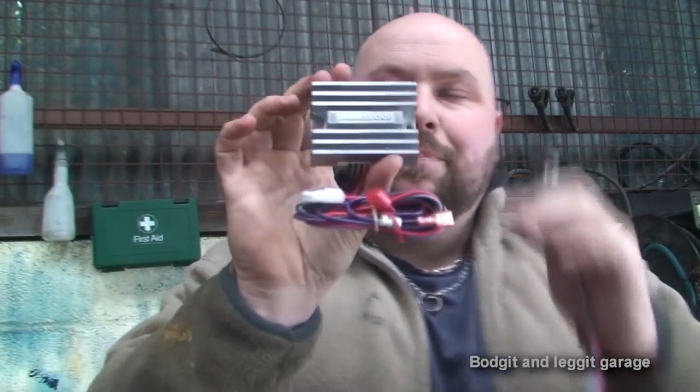So we have a brand new module here, and this is basically all clever and magic inside. What that does is convert—so we have this little gadget here too, which has a few leads. In between there you basically have an infrared beam. Every time the chopper goes through the beam, that sends a signal to this module, which converts that to a spark, allowing everything to work and spark each plug as the chopper goes through.

So these two are the most important parts. They're not cheap at all, but you don't have to do anything with them. They don't particularly break, they just are what they are. Best thing about these is you don't have to do anything—there's no maintenance at all. You don't have to come back every 100 or so miles to clean and check them. Maintenance free—you just put them in, fire away, absolutely perfect.

Which is a big thing, because with points, maybe once every couple of weeks you're adjusting, setting, and cleaning them, and it's a nightmare. Once this is in, we're going to have no problems. These are really the actual brains of the operation that we're putting in.

Now what should have happened is, with this fitting kit, we remove the old points, put this plate in its place, and this then screws to the plate—imagine it like that, set up for you, which is brilliant. But I can't do it with this one. I have to set this myself, but I'll go through all that. Not 100% sure I'm going to do it yet, but you'll see how once I do all the videos.

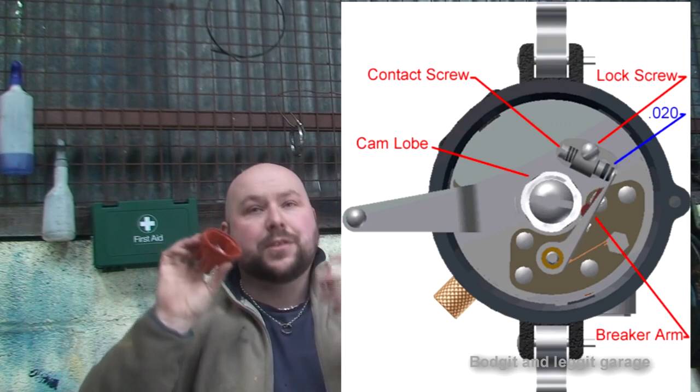Electronic ignition is just 10 million times better, because every time you come out to your car, whether it's cold, damp, or raining, you're going to start your car and it's going to start. It's not going to fail because of spark, whereas with points, it's a lottery - you can either start or it just doesn't. So that's the good thing about electronic ignition.

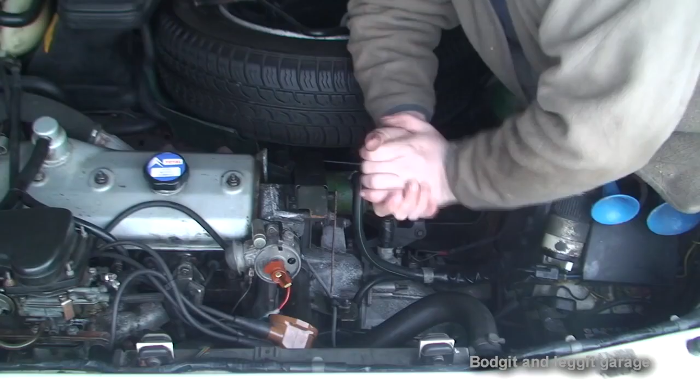I'm just going to show you on the car exactly what I mean. This is the distributor here. They more or less look the same on all distributors, some maybe slightly bigger, longer or shorter, but they more or less look the same. This is the distributor cap, which goes on over and clips. These are your spark plugs coming out. This is your rotary arm that spins around, and depending on which little pin it hits, that's which cylinder it's sparking.

But what we have on normal ones are the points here, so this just pulls off. On normal cars you'd have the points on the outside, but Citroen just likes to do everything different, so we have the points on the inside. The easiest way to know if you've got points or electronic ignition is to look for your condenser. If you've got a condenser, this gold thing here, you know you've got points. If you don't have a condenser, you know you've got electronic ignition. That's the easiest way to tell.

I'm just going to quickly whip this off and show you exactly what the points look like and how they work.

I do get how some people, if they've got an old car, want to keep it original. They don't want to stick new bits on, and I can understand that. But the other good thing about this particular kit is you will not know it's in. There's going to be a couple of wires coming out underneath here, but apart from that you won't really know it's in. The distributor is still going to look the same. You can even keep the condenser on top, so it'll look like you've got points. You can take it off, it doesn't really matter, but you can make it look like it's original.

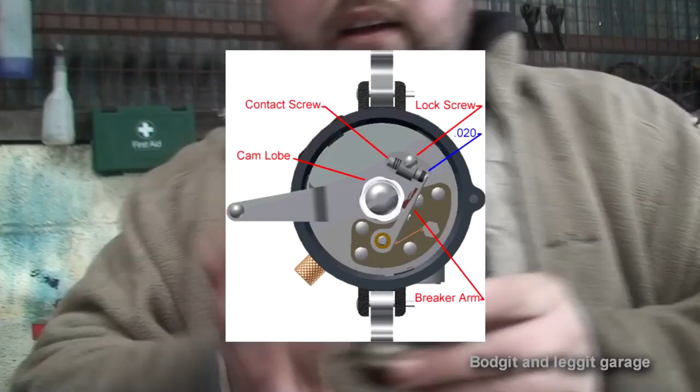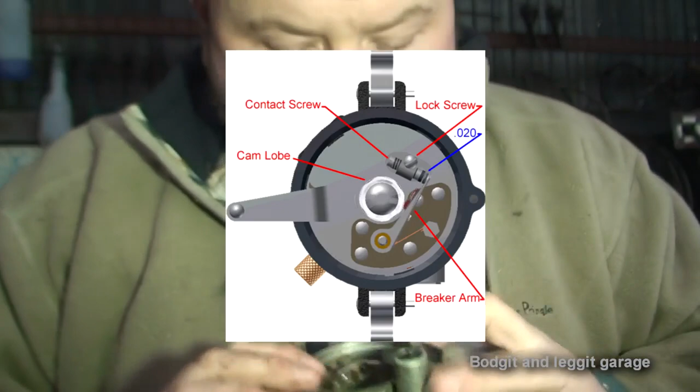Now, we have a set of points inside here. Just turn on the light so hopefully you can see a bit better. Essentially what happens is that bar you saw sticking out spins around, and as it spins around, this opens - not as much as this - but it opens and closes as it hits this little thing here, opens and closes, and that's what sends you the spark. That's basically how it works.

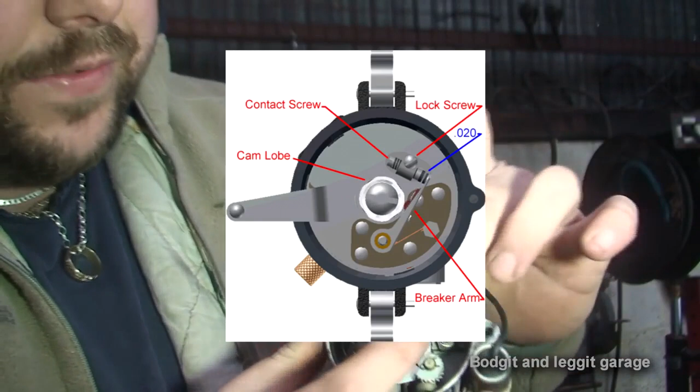But in these little strike pads, if them strike pads have gone, they've got dirty, or it's sparked at the wrong time and they've gone all black, they won't spark properly. And if they're not the right distance - if the screws come loose or anything like that and it actually moves - it won't open enough, or it'll open too much and the spark can't go between the gap.

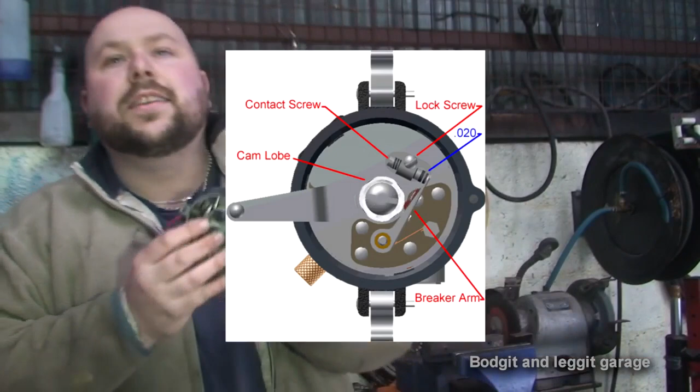They're not expensive to buy. New points, only a couple of quid. They've never been expensive, but it's the annoyance of it. You know, if you go to start your car and it doesn't start, and then, especially with points, if it doesn't start and you try and start, your plugs and your engine, they're going to flood.

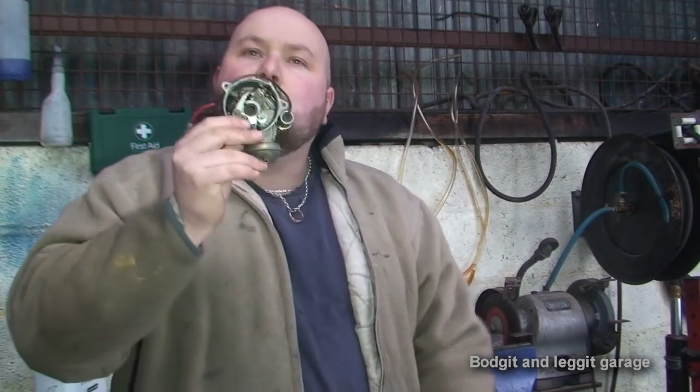So then you have to take the plugs out and you have to clean the plugs. You have to, and all this hassle because of these shocking things here. So once you take them out of the equation and put electronic ignition in, well then you're not going to have any problem whatsoever.

Obviously the newer modern cars with single coil packs and wasted spark and sequential spark, yes, that is better again. But with electronic ignition, you're never going to have a problem as regards the same problems you're going to have with points. Yes, of course you can still have problems - you can have problems with anything. Coil packs can go, anything can go, but it's going to be a million times more reliable than these points are here.

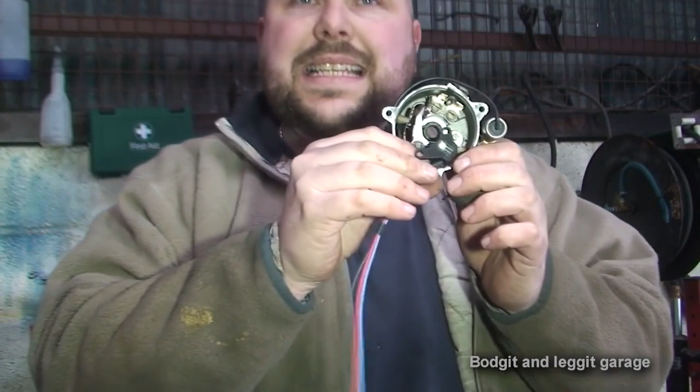So that's essentially what we're going to do. I'm going to take out all these bits and hide all these bits inside here, so you're not going to really be able to see it. My tricky point is going to be getting everything lined up so this is in the right place to hit when cylinder number 1 comes around.

That's what's going to take me a while. I'm going to have to make new brackets and stuff, but we'll do it, we'll get there. It's just unfortunately, rather than taking a couple of hours, it could maybe take a couple of days, but we're going to get there and the car is going to be a million times better for it. The customer comes out every day, it's going to start, he's going to have a smile on his face because he's driving his car every day and everybody's going to be happy.

So that's the bits we're going to put in. I'm going to go into a lot more detail once I'm doing it on the car, but at least you get the idea of what I'm going to put in, kind of what it looks like and what it does. I can only suggest if you have an old car, to convert it to electronic ignition, because you will just be a lot happier in the long run.

Now, we are replacing everything. If you're going to do this, replace everything - new leads, new plugs, new caps, new arms, new wires - because if you try and use the old wires, you're just going to cause yourself problems.

So if you replace absolutely everything and you're still having problems, well then you've got something else, unfortunately. But if you replace everything, you're not trying to go back on yourself. If you just replace half of it and leave all the old wires there, you're thinking, well, is it the wires or isn't it the wires, and all that sort of stuff. So I can only suggest when you do something like this, replace everything, buy the whole kit. Yes, it's not cheap, but you'll be thankful for it when the car starts and you get a big smile on your face when you're driving it all the time.

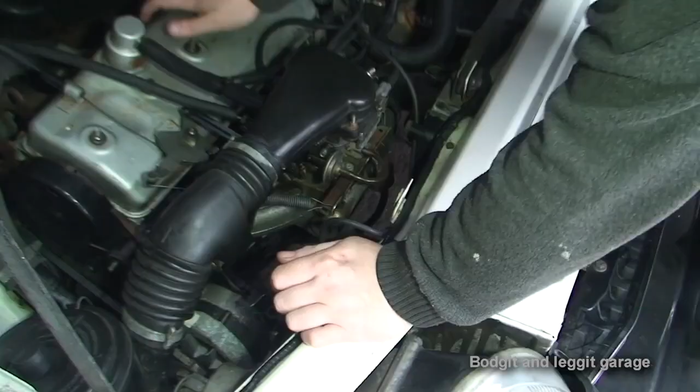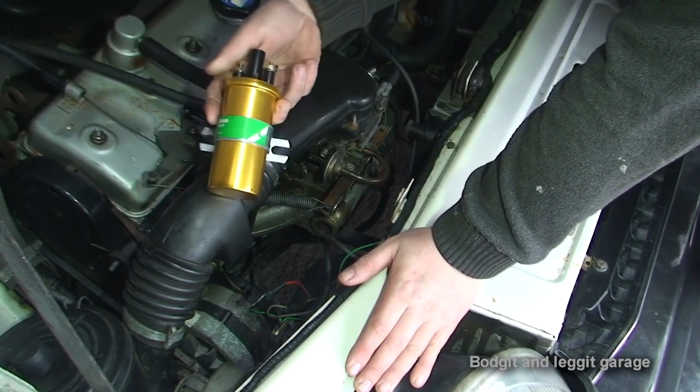Some things might be difficult for me to film because as you can see there's not a lot of room, but we have the old coil down here and the pre-resistor on the side of it. Once I get it off, I'll show you a lot better. It more or less looks identical to the new coil, even the way it fits in - there's just 2 bolts to let the coil fit in, or you can even just loosen the mount, it just depends. We're going to put the new mount on and everything.

You've got the HT lead that goes in, you've got plus and minus, so you've got the power that controls the rev counter and all that, plus also the power going into it to make the thing work. But we've got some really old connections here, so what I'm going to do is put the kit in first and then worry about the connections, because there's some part of the wiring loom I'm replacing and some part I'm not - I might have to put new connections on. As you can see with this wire here, we've got 2 connections within about 3 inches of each other.

Now the more connections you've got, the more possibilities you have for things going wrong. So I'm going to be taking out these connections because there's just no point having them - just having one connection, checking the wires. If the wires are okay, replace them with new connections, and we'll kind of go from there.

So what I need to do first is take this off, and it looks like 2 13 or 14 mil bolts. Well, the 13 mil bolts - one of them is easy to get, these are going to be quite tricky.

We only actually have to take one completely off and loosen the other one, because of the way the slots are - you should be able to get away with doing that. What I mean is, as you can see, these are slotted, so if I loosen one and take off the other, I can just slot this out. Now, just as I thought, we could slide it out.

But there's something else on here, let's just see what it is. We have the old coil - be careful because all these are coming off, you want to keep them. Now, obviously it's old. I don't know if you can see this, this is the pre-resistor here. There's a lot of rust, all the connections are rusty. This is the other connection I was telling you about, so you've got two connections within the space of a couple of inches of each other. So we're going to replace all of them. So there, that's it - all there, even the actual connections on the coil.

Again, I don't know if the camera's going to show this - try and spin it. They're all rusty too, so all that rust and the connections are loose, which doesn't help.

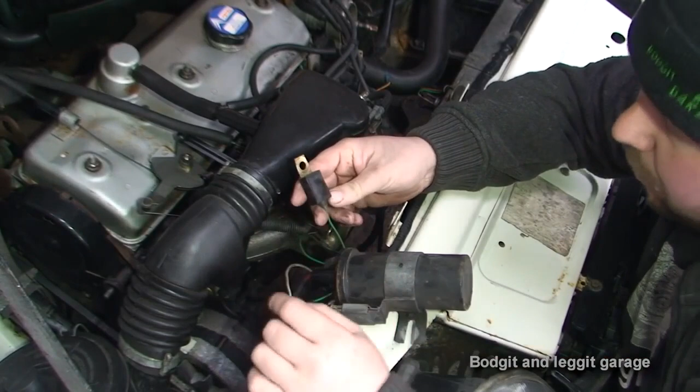So all that rust, loose connections, old parts—it all adds up to kind of a big deal when it comes to making this thing work. The last thing we have is basically a suppressor, a 2.2 microfarad one. What this is really designed for is radio interference. With this old setup, you might struggle to get radio stations or get interference. But with our new setup, we don't actually need this. It's a thing, don't throw it away, kind of keep it, and if you have any problems you can always put it back in. But with this new setup we should have no interference problems, so I'm going to get rid of it for now.

So all this is going. Like I said, I'm going to keep the original connections just for the minute. I'm going to wire everything in, and once I've got everything in place, I'm going to go through everything to see what I need to take off, what I can live with, and all that type of stuff. So we're going to install everything first before I worry about cutting any of the wires off.

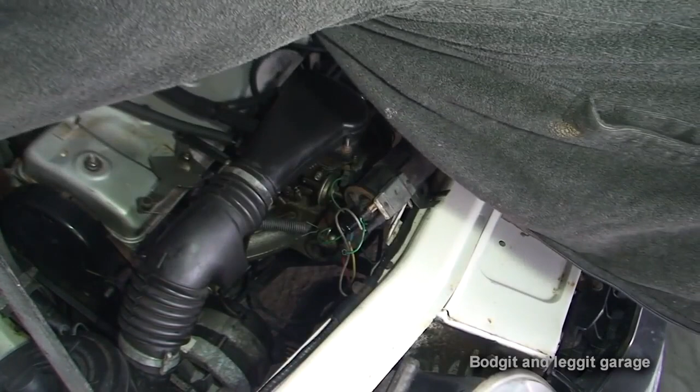What I'm going to do now is very simply just put this back. I'm also going to make sure I've got this the right way—as you can see from the coil, you've got a plus and a minus. This can twist within this, and we have the plus towards the engine, so when I put that in, my plus is towards the engine, not the other way. I can't show you because it's too dark down there, but I've just put it on the two little clips, two 13mm bolts, and that screws it securely to the frame or the mount of the car.

Now if you are unsure when you're doing wirings, it's always good to take pictures of everything. Just get your phone out and take pictures, because if you accidentally pull a wire or something falls off, you know exactly where it goes. It's no harm to have a reference.

What I'm going to do is—no point filming this because you can't see. I'm just going to put this second bolt on, secure this, then we're going to transfer the wires from this coil to that coil, and then we're going to continue on with the job.

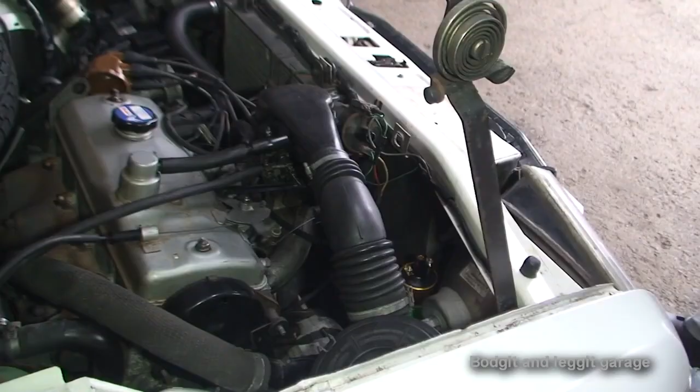Right, I tried to get a bit better camera angle. You can see the new coil just popping out here, and this is the old coil. Like I said, we're not using this, so I can disconnect that, and luckily the connection I was telling you about was actually for this. So we can take that out. Again, I'm not going to throw it, but we're going to take it out and just use the straight connection. So we've got two of the battery connections, or power connections, here.

Hopefully the camera's picking up, but you can just see how rusty that connection is. Now, we are going to be replacing all these connections, but for the time being, I'm just going to put everything in place before I worry about replacing anything. So I'm just going to connect these two wires.

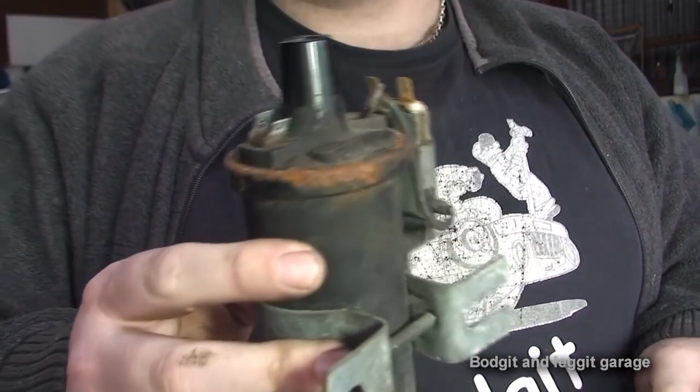Now we'll have the coil and everything out. So that's the old one. Now I can show you this a lot easier. You can see all the rust, all the connections, they're just rusty. This might not be the genuine one, but it's definitely going to be 20 odd years old, if not maybe 30 odd years old. So it's good replacing that. The one we replaced it with is a lot stronger and a lot more modern.

Again, we're not using this unless we have radio interference. We will use it, but at the minute we shouldn't need to. Now, a bit of history.

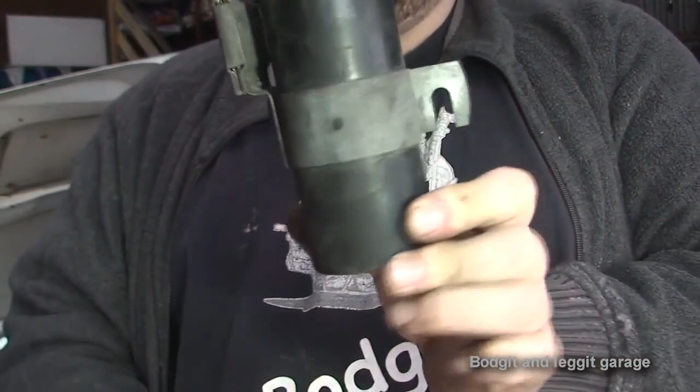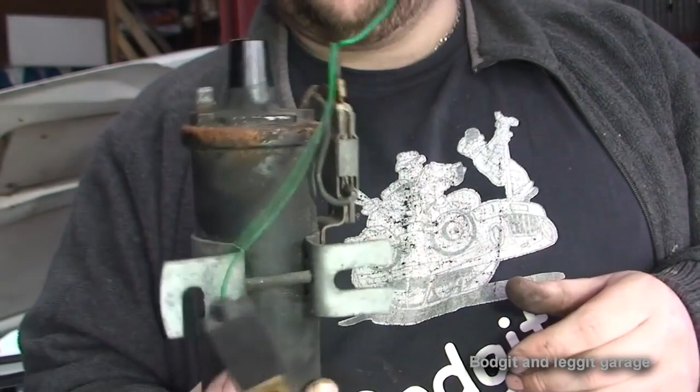And the other thing about these pre-resistors is if they're not working properly, they can take all the power away from the actual coil. So with the new modern ones, you don't need these pre-resistors. So we're going to put that away, not throw it, just put it away.

Next thing I'm going to do is take off and make the new HT leads. As you can see, I've marked the cap. It's 1, 3, 4, 2, which is the firing order, but we've marked the cap so when I take them all off, I know basically where to put them back. I am going to be getting a new cap, but I'm just going to use this one for the time being. Now I'm just going to pull the plugs out of the way.

Now the plugs are off. One thing I have noticed, I don't know if the camera's going to show it up, there's a thing here. It looks like a little suppressor on the HT lead, on number 1 HT lead, and it goes down to another little box. I think it's kind of a rudimentary diagnostic socket. This will monitor the spark and the revs, and it monitors other things as well. It's the same as the timing light you put on - this is basically what that is, so it allows you to monitor it.

I don't think it's particularly needed. I'm going to put it back on, but I don't think we really need it. It's not going to affect us. I can still put my timing light on, so it's not the end of the world.

But I just want to take all these leads off to get the length of them for the new ones. So what I'm going to have to do is pull this off so I can take that out now. And we can still get the length of the lead. So we should hopefully now have, as we can see, all the leads off.

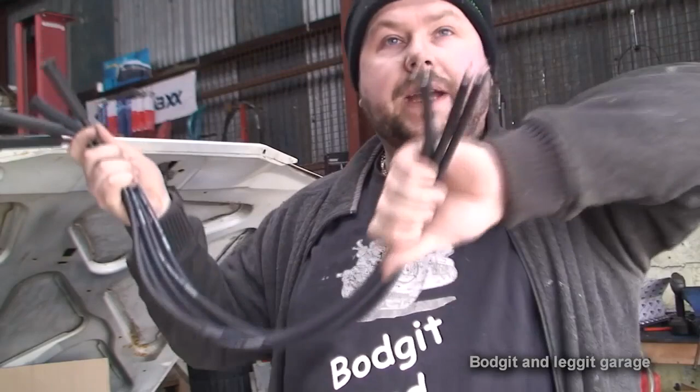And this is how we get them. We get the spark plug socket on one end, and we get nothing on the other end, because obviously we can cut these to size. Now you don't really have to cut them, but it just looks neater if you do. And we're going to use the old ones as the template for these new ones.

And we get the one in the middle then, that goes between the coil and the HT lead. That's got no ends on, so we need to make both ends, but lucky enough I think that's just the right length. I don't think we're going to have to cut that one, but we're definitely going to have to cut some of these here. So let's get this set up on the bench and we'll show you how it's done.

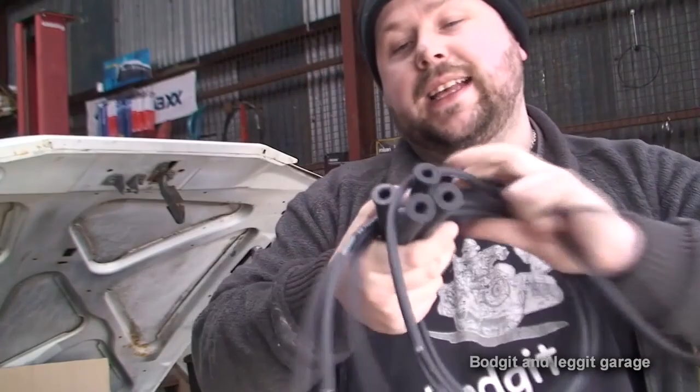Now, the way I like to do it is lay everything out first so you know where you're kind of going. So I've laid out the kit that I got. This is just some conduit, and what I'm going to do is put the HT leads inside this conduit so it just looks like there's one kind of lead rather than 3 or 4. I'm not going to be able to put number 1 in this because of the thing I showed you on it, but I can put 3 of them in it. It just makes it look a little bit tidier.

We have the old leads here, so I know the measurements, and we have 2 sets of connections. Now, unfortunately, they're both wrong. We're not going to use these ones, so we can move these out of the way. We need this one - this one is for the coil. And again, these ones are kind of right, but unfortunately, as you can see, they're a 90-degree angle, and we need straights.

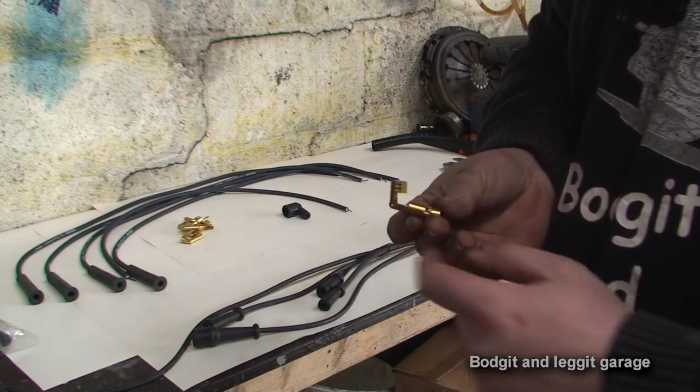So these are going to be no good, but these will be. Now, I'm going to have to cut these here, not use this 90, but that's not the end of the world. So I'm going to take one of them off here, I'll take number 4 off. Wait for a minute, just so you can see - these have been made up as well.

They're not genuine ones, and as you can see, if I pull this one out, we have the little connection there, so I can still use half of this connection. I'm just going to cut the 90 off and still use this connection, and I'm also going to use these rubbers here, so we'll be able to get away with it.

So it's just a case of pulling these off first, as we can see. Pull it off. Now I've pulled the whole thing together, but that doesn't matter. I just need to get that out there now. But as we can see, that is now out of there. But we still have this for our lead. So what I'm going to do is, I don't need the old connection, but I do need the rubber.

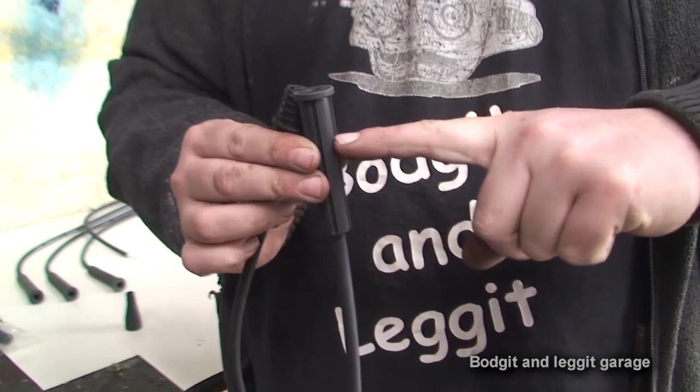Pick one of these leads. Now what you do have to be careful of is, inside the lead, the electrode starts there, so where it actually connects to the plug is there. So remember that. If your old lead starts at the top, you're going to have to stagger your lead, because you have to be very careful. These, to be fair, they look like they're about the same distance down.

It's a simple case. Now also remember, well, I didn't take that much off, so that's okay, but we need to cut, not here where the actual rubber ends, but where the actual bit inside ends. So we need to cut here. So just, that's another thing, don't cut where the rubber ends, because you need this bit of tail sticking out.

So just put them all together, put them down. And cut, simple as that. Like I said, these are new modern plugs, so internally they're a lot better and more modern than the ones we're taking off. And now what we need to do is cut and get a little tail, as you can see, so the wire in the middle, we need that now. And again, you can use the bit you've cut off as a guide, so you know roughly where to cut it.

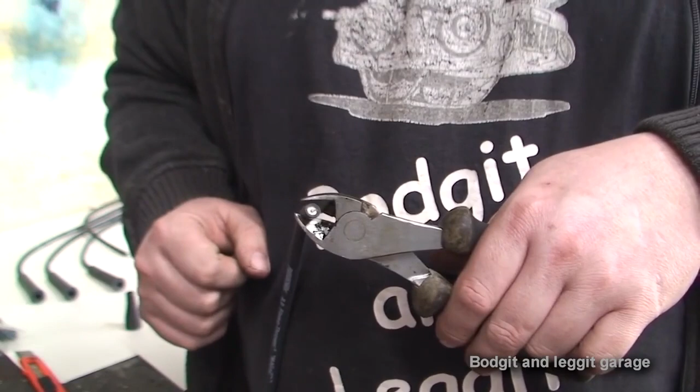Now you have to be careful here, this is like stripping wires. You have to take the rubber off and the white core out, but leave the actual bit in the middle free. And if you're unsure and a bit scared, the easiest thing to do is practice on the bit you've just cut off. Now all I'm doing is basically cutting it, and you can actually see that popped out. But again, I'm used to it. I'm used to doing that with wires and all sorts. So practice on the new bit first.

All I was doing, as I was pressing it, I was twisting it around my hand. So I'm cutting it, but I'm not pressing. If I press all the way through, too hard, I'm going to cut it off. So I wasn't pressing all the way through, I was just cutting it. And once you've done it, you can actually see. But again, if you're unsure, just practice.

So again, I'm going to do it on the proper one. So just cut it round and pull it off. You can feel it going in. Simple as that. But you have to be careful, because it doesn't take much to snip that off. I'm going to use this, rather than using this to crimp it, because on the 90-degree bend, I'm going to crimp it internally here. Still exactly the same thing, it's not going to make any difference.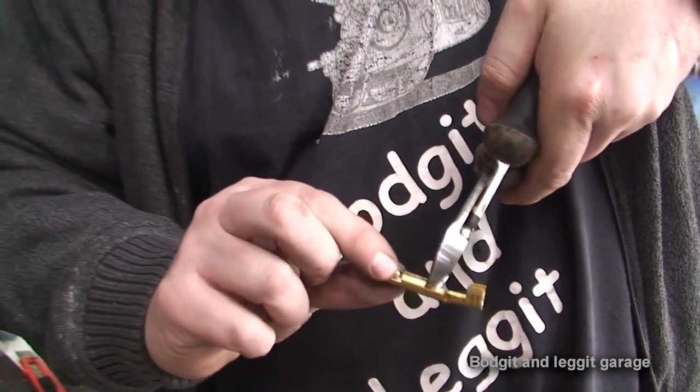I just need to make this smaller. So you can actually just push that straight for the minute, so I can get to it. And all I'm going to do is, how close do I want it? Yeah, that'd be fine. Cut this directly at the split. I don't know if you can see that, there's like a split in there, so I'm just going to cut that directly from the back. This might be a lot harder than... there we go. Just get through there.

Now I'm left with just that. Now once we've done that, what we need to do is bend the little tail down like that. Simple as that. Put this on then, not that one. Put this on now. The little tail you've bent down, make sure, as you can see from the connection, this is the split end, make sure it goes in where the end isn't split. So make sure it goes on the back where it's flush. So all you got to do, you can see, I'm just going to push that down.

Again, it can be a tight fit, so I'm going to have to open this out slightly. So I'm just going to open the connection out slightly. So I've just, hopefully you can see that, open that out.

Lucky enough that didn't go down, because what I've got to do is put on the rubber connection first. Now, these are thicker than the old leads, so it's going to take a bit of fiddling just to get this down.

To make it easy, I'm just going to spray a bit of lube down here, so this should hopefully slide on that bit easier now. Once I get it past it first, initially it's going to be okay. It's just trying to get it past.

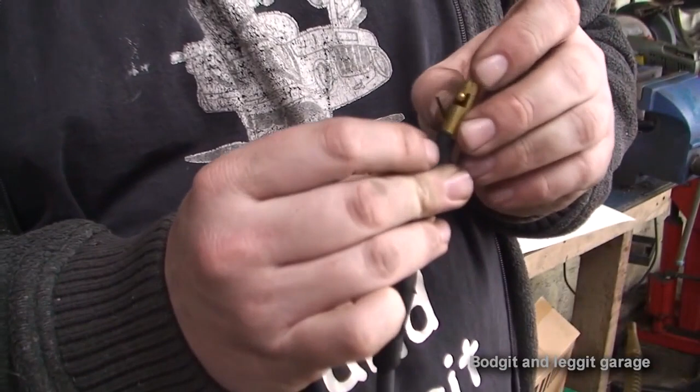Now, so the little leg we was talking about, you push the leg down and make sure it's at the back, not at the point here, because obviously as you can see it's not going to get a proper connection if it's there. So we need to make sure that's at the back. It just stops it from moving and puts it in the most secure position possible. All we do then is slide this all the way down until it meets the top of the connection.

Then we need to crimp it. Now there's most probably a special tool for this, but I don't have one, so I'm just going to use the pliers. I've never had a problem using pliers before. First I'm going to squeeze it together, but then I'm actually going to crimp it down.

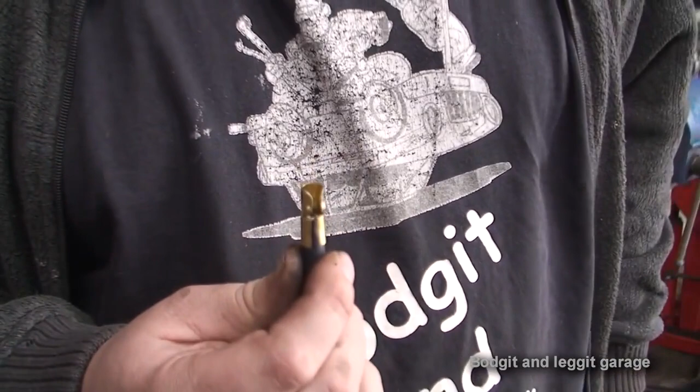I need that, as you can see, I don't know if the camera's showing you that, but that's actually gripped into the rubber. If I show it this way, and we can do the same with this one, it's actually gripping down and pinching the rubber. Rather than just squeezing it together, I'm trying to squeeze the two ends down so they actually pinch into the rubber.

As you can see, that's basically it. So again, it's best to squeeze it together and crimp it down at the same time. Let's see if I can do it on camera. It's a bit difficult on camera, but you get the idea.

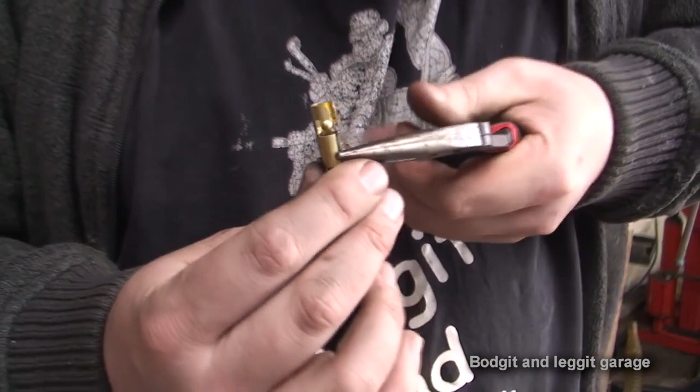So we can move further down into the pliers, crimp it down, crimp it together. As we crimp it down and crimp it together, believe me now, that is not going to move. And it's always a good thing to check it - try and pull it apart, because you shouldn't be able to. If it pulls off too easy, you know you're going to have to do it again.

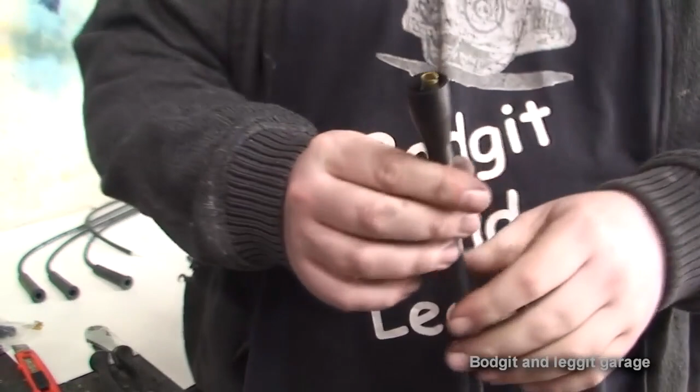You kind of do have a couple of goes with this, but you do want to just get it right the first time. And then we slide this back up. You want to keep it - well, it depends on what cap you've got.

But you want to keep it just above the cap. Maybe sometimes you might want it about there. The easiest way to know if you've got it right is you want to fit it back in the cap.

Make sure it actually crimps in and pushes in like that. You don't want it pushing in and it only goes up to there - it needs to go all the way in like that. So that's how you know, and it's as simple as that really, nothing to it. And then the other end is for the plug.

Now, yeah, I can't show you the connection inside there, but it's very similar to the connection I've just shown you.

You can feel, now this is not the right plug for the car, but you can feel it kind of clipping into the connection.

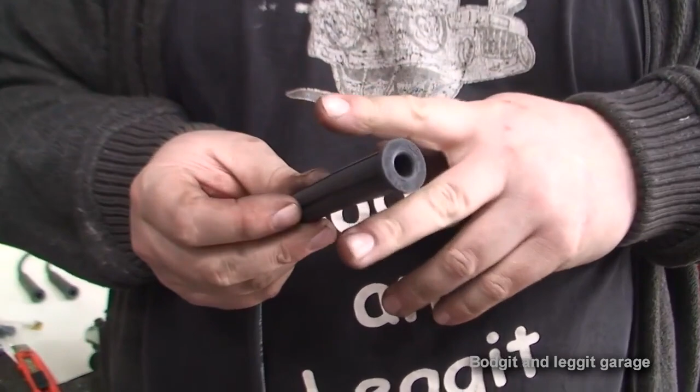These connections can work their way loose too. So if they don't feel like a good connection, you can very carefully get some pliers and push down onto them, just to crimp the connection together - you're not able to see in there, but that's as simple as it is.

It's very, very simple. What I'm going to do, just so I know for my own sake, is do one lead at a time and mark on the lead what number it is. So this lead is number 4, I'm just going to do 4 lines like I did on the distributor cap, just in case for any reason it gets muddled up and I don't put it back, we know exactly where it goes.

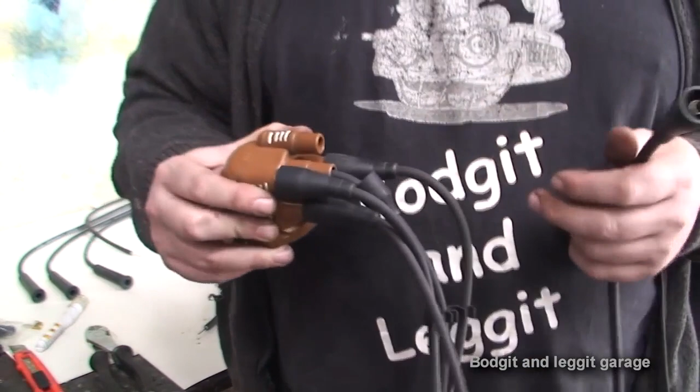Once you've actually got the job done, you can just wipe the Tipp-Ex off so you can't really see it, but we just know then that this goes to number 4, we know it's in and we know it's fine. I'm going to do the rest, the other 4 now, because I've got to do the centre one, and once I've done that we'll turn the camera back on and it's one more thing done.

One thing you need to make sure of is when you're crimping these connections, if you crimp it just one way - I'm going to show you this old one - if I press all the way down, you can see that's now oblong, that's not completely round. And the problem if you do that...

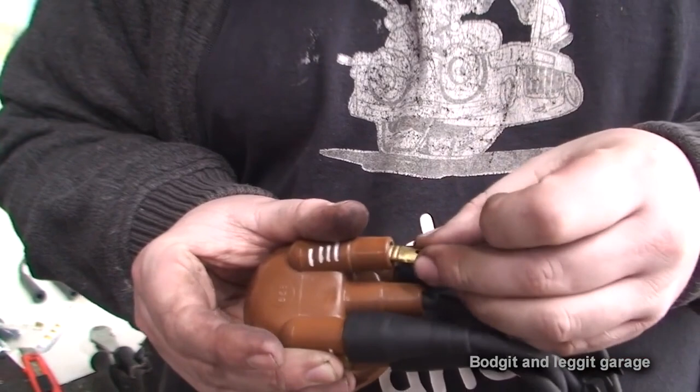It won't fit in the hole. Now I know it goes this way, but as you can see, it's not round and it actually gets stuck. So I'll just show you this way - it won't go in. So you have to make sure these connections are round, well, not perfectly round, but a lot rounder than that.

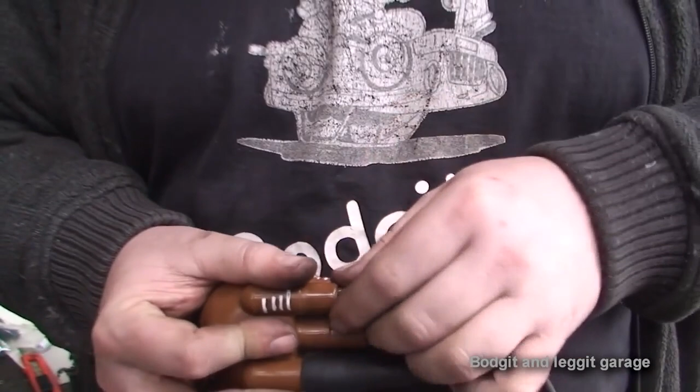As you can see from the connection I've just done, you can push this in and this will go all the way in. I don't want to do it because I want to put this on here first, but as you can see, that will go in, it's not going to get caught. It doesn't just go that far, it goes all the way in, it's not going to get caught.

So it's a good thing to make sure your connections are round, because when your cover's on, you won't be able to tell properly if it goes all the way in, and it might not be making proper connection, and you'll be thinking, why is the car not starting? And the last place you're going to look is here. So just double make sure that connection goes in all the way.

Now this is the thing when you're doing a job like this, everything keeps changing - I've changed my mind a few times. On the main lead that goes to the coil, I've put a 90 on it, so when the actual cap is in, as you can see, this comes off at a 90.

It used to be straight, and as you can see, you're kind of putting pressure on that wire there. So what I've done is made it a 90, so this can go off to the coil and it's a straight connection, it's not putting pressure on the actual connection here. It's nice and straight - that's something I kind of thought of as I was doing it.

I cut this connection in half and showed you how to fit it, but I've stopped that. I didn't like the connection, even though it would have worked, but I just didn't like it. We have enough room to actually get one of these connections straightened out, so as you can see, I've just straightened it out.

To put the straight connection on - but luckily this rubber cap is long enough to actually take that. So that's what I'm doing now, I'm just going to put it exactly the same way in, squeeze the two ends down.

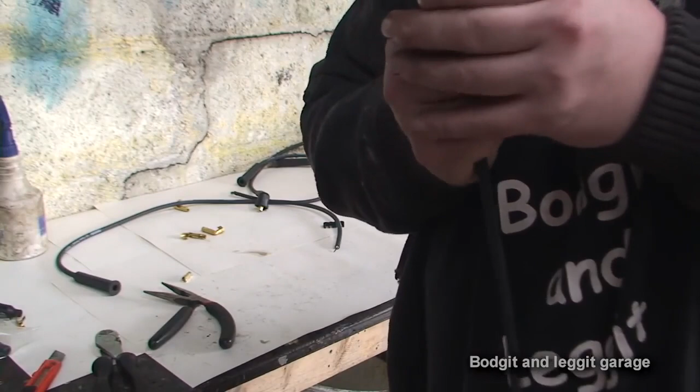Squeeze the two ends down and give these a nice squeeze down and together. It doesn't matter if they're sticking out slightly like that, or if they're not perfectly round. All that has to be perfectly round is this connection down here. But this will still slide on to about there, because that's where it needs to be. And it fits in nice and easy, just like that.

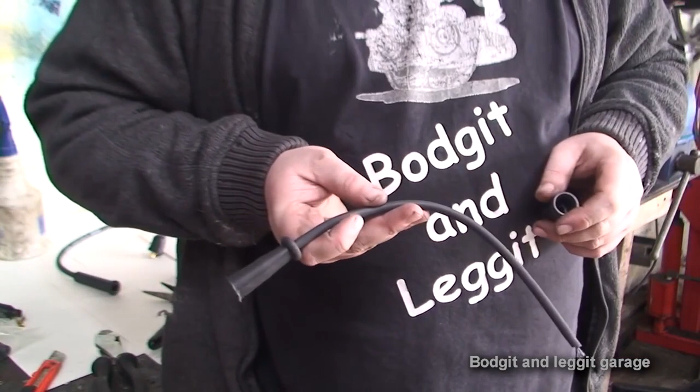Now the only thing I've got to be careful of - number one, it's falling off, but it doesn't matter. Number one, I can't make up on the bench. This is number one lead. I have to make it up on the car because I have to slide that little electrode thing, or electromagnet, whatever it is, through, so it can actually monitor the spark. So I'm going to do that on the car. That's the last one I've got to do, but it's going to be done exactly the same way.

As you can see, they're a lot thicker, a lot nicer, and especially with this connection being a 90, it's not going to put so much pressure, because this is the most important lead. This is the lead that brings all the spark, and then it separates it to these ones depending on where the rotary arm is. So it's going to look a lot better.

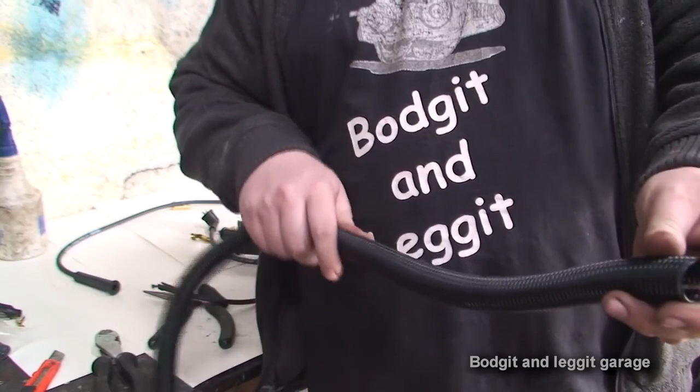And once I put it in this conduit, again, it's going to just look really neat. We can then put the conduit and maybe cable tie it to some part of the engine that's not hot, obviously, and it'll just look a lot nicer when you look under the bonnet.

So let's get cracking. Now, what I figured this is actually for - this must control the rev counter. So that's what that does. It basically reads the spark and gives you how many revs the engine is doing. So you have to remember to build this on the engine - I have to put this connection on the engine because, as you can see, it doesn't come out. So that's just a quick thing.

What I've done here is, as you can see, I've got the actual cap, and I've put it all in a conduit, so it's nice and neat, and the leads are sticking out. I can't put number one in it, but I might be able to slide number one in just a little bit - it's going to make it a lot neater. And with the 90-degree bend that's on here, that will actually stop - as you can see, that goes to the coil then - that won't put any pressure on the actual coil wire, so there'll be no pressure on the joint there.

But that's just how it evolves as you're doing things. You just think of things, think 'oh, that's a good idea,' and it just kind of evolves that way. So what I'm going to do is most probably put this one under here, cable tie it nice and neatly, so you don't really see that.

What I'm going to have to do next, I'm going to take the spark plugs out, get ready for the new ones to go in. The 16mm spark plug. Oh, that's very tight. Jesus, that is tight. Need a longer ratchet, but that is... Oh, that was tight.

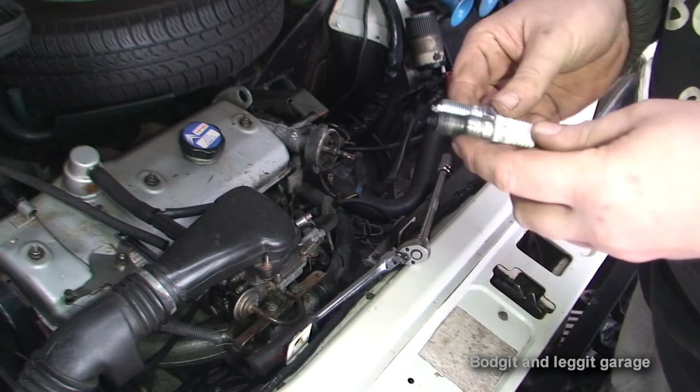Now these plugs are going to be very black because the car wasn't running properly. So we're going to put new ones in. With all the new stuff we put in, it should be a million times better. The new ones we got are the same name, so we can actually check the numbers, and the numbers are right, which is good - so we definitely know we've got the right plugs, but it's also just a good thing to check the length, everything about them.

And as you can see, that's the black one. Now, when a plug burns properly, the colour you need to look for - it's an old plug, but as you can see, it's kind of a biscuity colour. That's the colour you need to look for. To be fair, on this car, you might not get that exact colour because it's the older kind of style of ignition - this is designed for a coil pack, and that's obviously a lot stronger spark. Now, we are going to get a stronger spark with the system we're putting on, but that kind of gives you a good idea what to actually look for. Again, it's very black, and there's a lot of petrol on there because it wasn't running properly, again.

So we are going to get black crappy plugs. Now one thing I'm going to have to be careful of is I don't know if we've got any problems with the carburetors or gaskets leaking or anything like that, which means it's going to be drawing more air in and tricky to start. So what I'm going to do is put all the system in and see if it starts. If we're still having problems, then we know we'll have to look into this, but hopefully that's not the case.

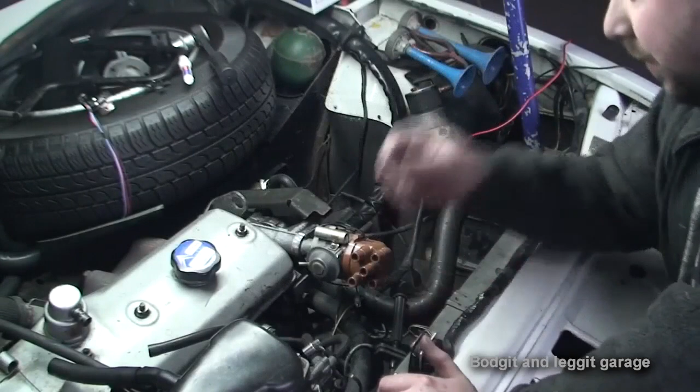Now I've been at this for a couple of hours, and hopefully I think I've kind of got it right. So I'm going to go through with you what I've done, what I think, and we'll just kind of go from there. Now I'm just going to move this back for a minute.

This was the position of the original distributor, it was in that position there. As you can see, I've got Tipex marks everywhere because this is important. So this was the original markings of the distributor, and as you can see, I've got Tipex marks here and one on this side which you can't see. This is for spark plug number 1, and this is for spark plug number 3. They're just marks for me.

So if I whip off this, again, I've got Tipex marks everywhere. Now this Tipp-Ex mark here lines up with the middle of here, which means this is cylinder number 1. This is when cylinder number 1 sparks. When you turn the engine and it goes to this mark, it means cylinder number 3 is going to spark.

Now the plan is to hide our new part in behind here, so I'll just move that out of the way. Now as we can see, I've got more Tipex marks down here. You might not be able to see, but I've marked these little weights inside because I'm going to have to take the distributor off, and I want to make sure I get it back in the same place, because otherwise it's going to cause an absolute nightmare.

Now what we have to do with this little chopper, now I'm hoping this chopper is right, it looks right to be fair. Once I put it in the middle here, it lines up with all the little contacts inside. So each chopper lines up with the contacts inside, so I'm pretty certain it's right. So what I have to do is fit it into here. Now I'm not 100% sure yet how I'm going to actually seal it to this. I might just put a few washers to kind of keep it pressed in.

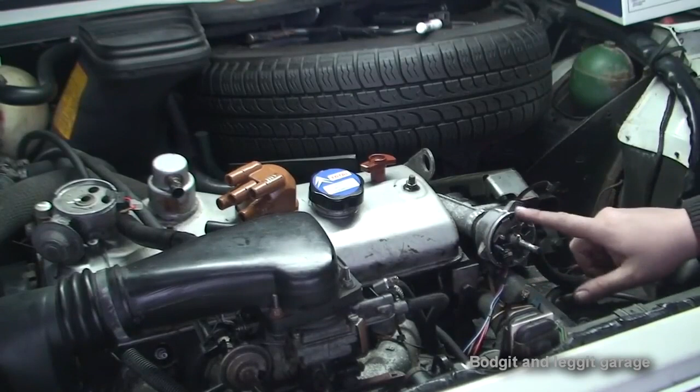That's not going to work there. Now this is where it kind of gets tricky. Maybe it's not going to affect anything if I put it down here, or even like that, and potentially use this as number 1. The only reason I say that is because this little gadget is not going to know that this is number 1 here. I'm setting this up to be number 1, so it's not going to know any difference.

Even though the actual rotary arm is going to be pointed up that way, which is not going to make any difference to me, it's still going to spark at number 1 here. So I might have to do something like that. But even that there now, let me see that one. See, we're getting very close to all these little nubs.

So maybe, let's see, definitely can't do it there. We're not going to be able to do it there. So this is now just turned into more of a nightmare. Now I think we'll get away with it there. I think we will get away with it there.

But again, I'm going to have to rip the distributor out just to see before I do this. And because I've got everything marked, it doesn't make a difference. I can just put it back in if it's not going to work out. So, yeah, I'm just going to see now if that will work. I can't see why it won't work, because it doesn't know.

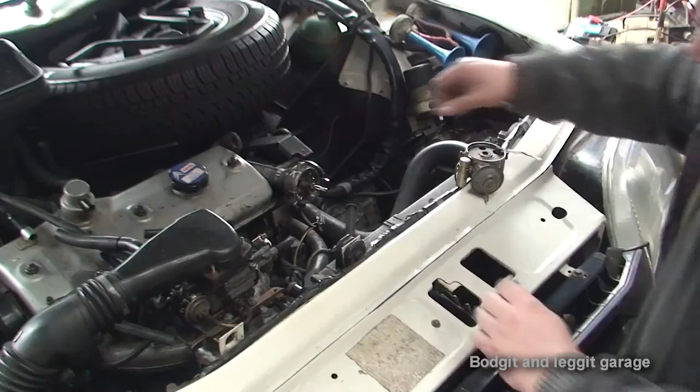I'm setting this up as number 1, so it doesn't know which one is number 1, 2 or 3. I'm going to have to do a bit more thinking on this, and then I'll turn the camera back on and I'll see where we're at, and hopefully we can figure something out.

Right, hopefully this is all coming across. We have the distributor here and I've got it all marked. It's very important, before you take it off, you need to mark the actual body of the distributor, where the main body fits onto the car, which is very important. But not only that, you have to also mark the inside of it so you know where it goes back.

Because, for example, if I take this out, I can spin this, as you can see. Oh, maybe not. I can spin this in any direction and just fit it back. The body of it will line up, but the inside is nowhere near the right angle for it to spark. So it's very important that you actually mark everything properly before you take it out.

Now what I've done is, and it sounds very simple, all I needed to do was drill 2 holes in the main body of this distributor to line up this bracket to hold the electrode, to make it spark. That sounds very simple, and it's taken me hours upon hours to figure out, but hopefully I've done it.

As we can see, I've got a hole here and a hole there. I've had to modify this bracket, shaving off the legs to make it a bit thinner, because I was having clearance issues with the weights inside here. As you can see, this spins around, and I needed this bracket low enough inside the distributor so it would fit and line up with the chopper, so it would all be in the right place.

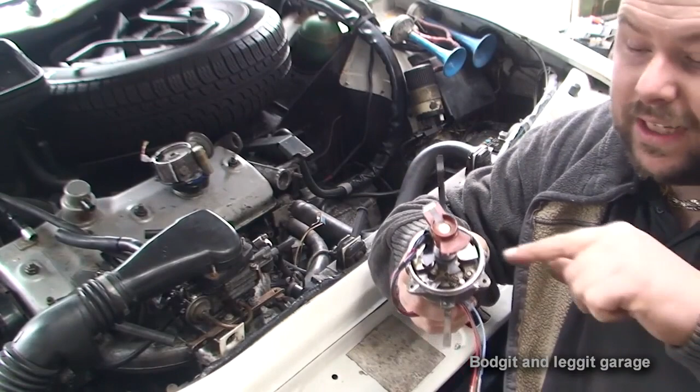So I'm going to drill and tap these 2 holes. M4 is the size of the bolts. So I'm going to drill and tap these, get this to fit. Now here we go, I think I've got it done. Doesn't look like much, it's technically only had to drill 2 holes, but getting this lined up has taken forever.

I'm going to have to glue this chopper down, I think that's going to be the best thing to do. But basically, as we can see, I've got marks on the distributor for the cylinders. So we've got the firing order 1, 3, 4, 2. Number 1 is lined up with the Tipp-Ex mark, that's chopper number 1 gone through. As I twist it around, chopper number 2, and as I twist it around to all of them, they all line up with the marks. So I should be fine.

I might have to adjust the distributor slightly, but we can do that once it's in. I'm not 100% sure because this is the first time I've done anything like this. Normally it's just an easy case of fitting them, but getting all the clearances right, making sure everything can turn without catching, and lining everything up, is taking ages.

There was no point filming it, it was just too boring. I had to put it down, turn it around, make sure it wasn't catching, then line up the distributor marks, and it's taken forever. But as we can see now, I've got it. If I take off the rotor arm, you can see as that turns, the rotors go through the sensor, cutting the sensor, which then, from these leads here, turns that sensor cut into a spark. That's how it works.

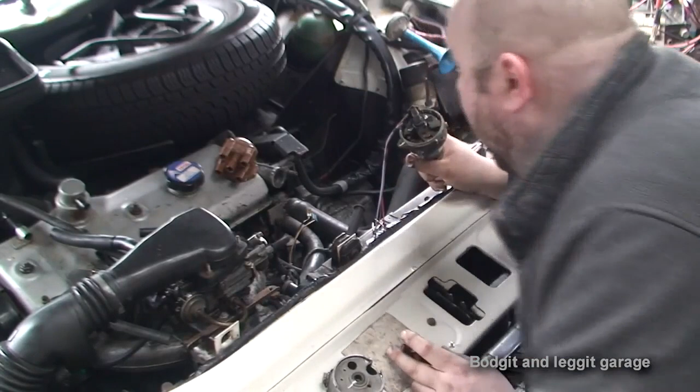You shouldn't have to glue it on, but I'm going to have to glue it on this particular case. I can't really see any other way around it. Worst case scenario, if it ever does break, we'll just get a new rotor. It's going to be annoying when it's glued on, but I can't see any other way around it. To be fair, as long as nothing moves, this rotor will never really get damaged, so it should really last forever as such. We shouldn't have a problem there either.

I'm just going to have to make something up for this, some sort of metal plate to stop most of the crap from going in. And that really is essentially it. I mean, there's not really much more to go now, I don't think. I shouldn't have said that now, because that's mostly going to come back to bite me.

But yeah, I think essentially we are very, very close. We do have to make sure that the holes we've opened up are going to have to be blocked off, because we don't want to get crap in here. Even though if we do, it shouldn't really matter, but we still want to keep that inside as clean as possible. So once I've got this on, there are going to be a few things we have to sort out just to get it kind of watertight.

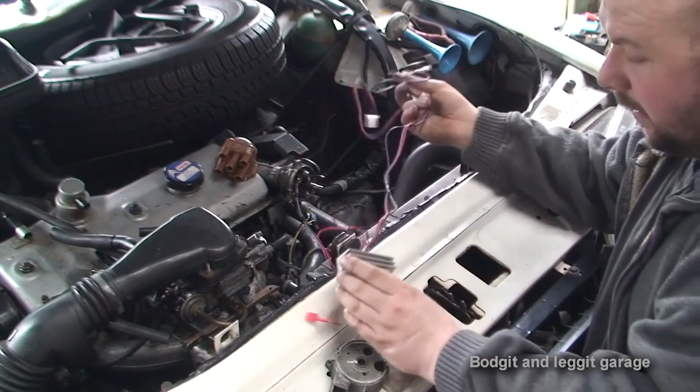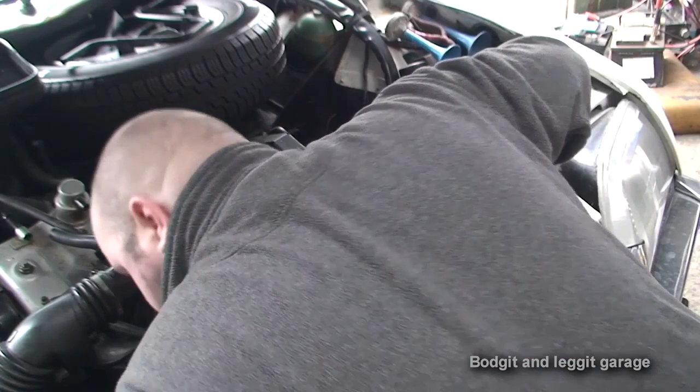It's just a case of wiring now. The 3 wires coming out of the distributor go into another block connector, which goes into this connector here. Then we just have a few more connections that go into earths and stuff like that. Very simple. I just need to figure out which is the best place to put this, because I want to kind of hide it, I don't want this to be seen here. Hopefully we should have enough to hide it somewhere down near the coil. I'm hoping I can mount it at the back of the coil or something, but that shouldn't be too hard, hopefully anyway.

And it's just a case of getting these wires nice and neat. I might have to bring the wires up to here and tape them inside this one. I'm not sure yet, we'll figure that out later. But that's really essentially it, it's just wiring now. So I'm going to leave the wiring to the final part of this video, and hopefully I've explained what I've done here. It is fairly simple, it just takes a long time to get lined up.

With the normal kit for this, you'll have this part done in seconds. It's not really a big deal, it's just the wiring then that can take a while, but hopefully now we should be very, very close to hearing this thing fire, and fire properly.

Fingers crossed. What we also need to do is open up the spark gap as well to 0.6. I didn't mention that on the other video, because we've got a bigger spark now. We can open up the spark plugs to 0.6, so we'll have bigger spark, and everything should run a million times better. But what I have done is I haven't done any damage here, so if someone ever wanted to put it back to the original points, you can actually do that. It's important not to just rip everything out, because you can always put it back at a later stage if you want to.

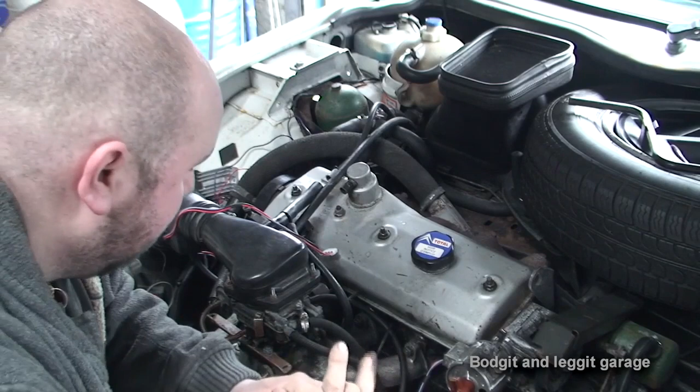We're going to wire this all in. I'm having a few little problems in the sense of where to put everything, but we're going to kind of wire it in and then maybe sort out placement afterwards.

The first thing we need to do is put these three wires into this connection block. You're not able to see it well on camera, but they're marked 1, 2 and 3. The easiest way to find out which ones are which is if you look at the other one, it's actually marked 1, 2 and 3. So we know number 1 is red.

So I can put the red one into number 1 because they're matching up with the same, they're also matching up. These just push in, you just need to push them in and they clip in just like that. So number 2 has to be black, only one left. Right, so got that done, that's the easy part. Now they're all in, just connect this just to make sure it actually does work.

And there we go, I just pulled out that connection. So just need to make sure that's definitely in properly. It is now, try again.

Now we have that connected up. Hopefully you can see here, yeah you can.

This is the only place I can think of putting this control box. I can put it closer down here to the coil, but I don't want to, because all the crap from the road can come up and hit it. Even though it's a sealed unit, I just want to keep it as clean as possible.

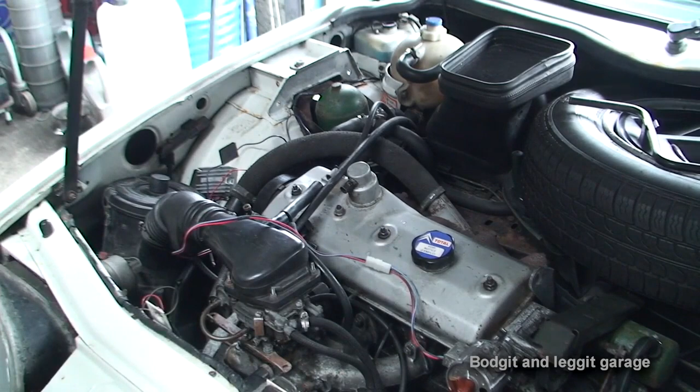So what we need to do now is wire it in. I've disconnected the battery and the power off the battery, so that's important - that's the first thing we need to do. It's kind of straightforward after that.

We have this violet wire here which goes to the negative side of the coil, so that just clips into the coil. We have a black, which is an earth, so that can be bolted in behind the unit and put to an earth - simple enough.

Now the next one is this red wire. There's a few different ways of doing this. What we need is a switchable line - as soon as the ignition turns on, this has to be live. This isn't a constant live. If you put this on a constant live, you'll burn out the box, because you're only supposed to have this unit on for 10 minutes before starting the car. Any longer than 10 minutes with the ignition on, you could do damage. So we need it so that as you turn the ignition on, this switches to live.

We can most probably go to the coil for that, or we can also go to the ignition - the only downside is it's a lot more wiring. So what I need to do now is, we have a few wires we're not using. These two wires we're not going to use again, these are for the old points. And we have a wire on the coil pack which we're not going to use.

So what I'm going to do to find out which wires are which - even though to be fair they're the same colour - is show you how to figure out which is the right wire. I've got my tester and I've put it on a continuity test.

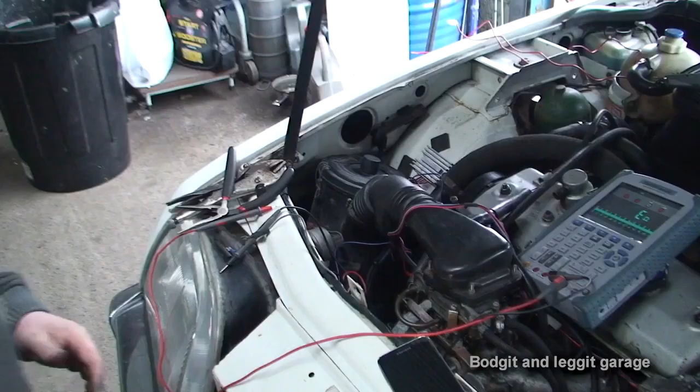So now I have the main feed here, so when you turn on the ignition, this sends the full voltage to the coil. But the problem is, as you can see, it's very, very rusty, and sometimes I'm getting 12 volts, sometimes I'm getting 2 volts. It could just be the connection, or it could be a problem with the wire all in here. I've tried tracing it back, but this connection is stopping me, so I'm going to put a new connection on it.

Once I've got a good clean connection, I know I can go on and see if I can trace the wire. But if I'm getting a good clean connection here, and I'm always getting voltage, I know it was just a connection. So what I'm going to do is just put a straight connection on. Crimp it down. Just check it to make sure it's okay. Got my heat shrink then, which I'm just going to seal it.

The reason why I don't like using the sealed type ones is because they don't seem to give a good seal. Water can get in behind here, and once water gets in behind and starts sitting in here, it'll just rust it. Sometimes you're better off leaving the connection bare, to be fair, but you don't want it to cross anything. So what I'm going to do is put this heat shrink on it, which will then close both ends, and we should be fine.

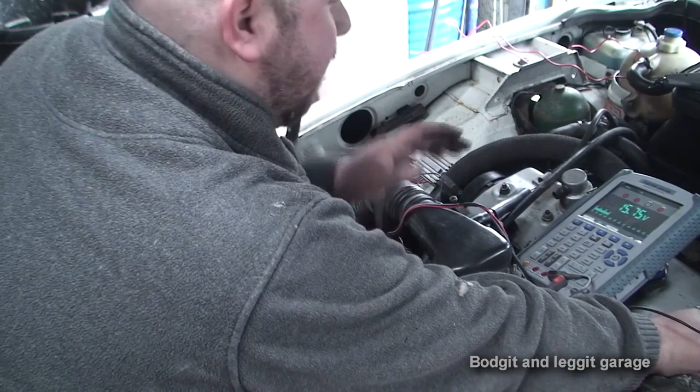Now I've done that, and it looks like we're okay, hopefully it's going to come through. When I put the connection on, we're getting 15 volts. Now the reason we're getting 15 volts is because I'm charging the battery, so normally you wouldn't be getting 15 volts, just because I've got the battery charger on. But as you can see, we're constantly getting that now, where before we was up on 3 volts and then 8 volts, so it was up and down. Now we're getting a constant steady voltage. So that's good. It looks like it was just the actual connection, and like I said, no water's going to get in here. It's the best way of doing it, in my opinion.

So now we know we've got that, which has saved me a lot of hassle. Because rather than try and trace back the wire, trying to find a cut, what I'm going to do now is...

Put, lucky enough, on the kit we get, for the power wire, they gave us a little connection which I can't get off. They gave us a little connection which will actually bolt onto the coil, and it'll give us the right connection so we can connect the power wire. The reason why I can connect the power wire to this coil is because once you turn the ignition off, the power goes off, which is important. If the power didn't go off and that box stayed powered, you would damage it. But because it goes off, I can actually put it to the coil, which just saves me a hell of a lot of wiring and a lot of messing around.

I'm using all the connections that came with it, so it's going to be nice and neat. We're not going to have an issue as regards that. All I've got to do is loosen the 8mm bolt on the coil, and I'm going to fit this wire to it.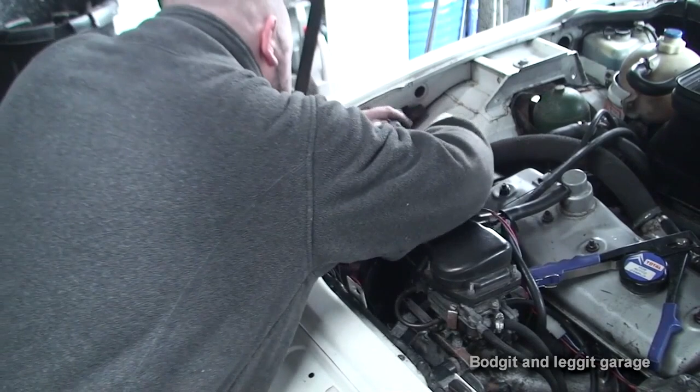We'll drill one first anyway to line it up. It's always best just to do one first, just so we get it lined up. Using a 7.5mm drill bit. Now you have to be careful there's nothing in behind it because I'm now drilling where the wheel is. You want to make sure you're not going to pop the tyre or cut any wires or anything, so you do have to be careful.

And make sure your battery in your drill is charged. Now what will happen is that will fit down there, as you can see. Once I crimp that together, you'll have a lovely threaded bit left behind. They're absolutely brilliant.

Before I do that, I need to sand this. I just like to get a bit of sandpaper on just to take the paint off, just to make it a little bit better, because I'm going to earth this. Actually I don't need to do it on this one, I'll do it on this one instead. Well, it doesn't really matter, but I need to do it on one of them, because I'm going to put the earth for the box on it.

Now that'll do lovely. Next thing I want to do is just thread this bar onto this machine, very simple. As you can see, let's set it down a little bit more. Now just put it in and squeeze. I just need to thread that a bit more.

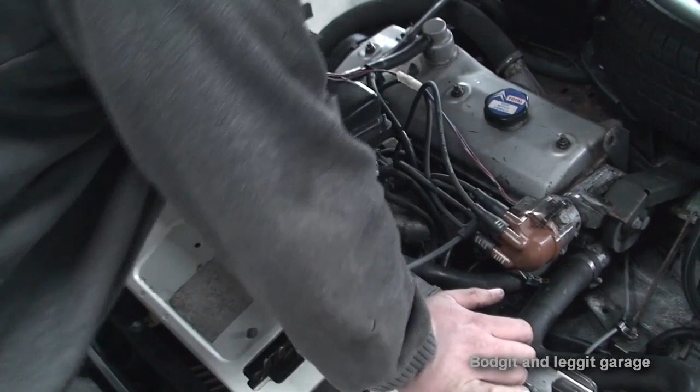Now I have to say, that sounds very sweet. I thought I might have to do a bit of tuning, but I don't think I'm going to have to, but I won't know yet. I'm going to let this heat up first, because it's important to let it heat up and see if it starts when it's hot. That's the important thing, because if it starts when it's hot, we'll know we've got the timing kind of right. So we just have to let this heat up first. But I have to say, so far so good.

Sounds lovely, doesn't it?

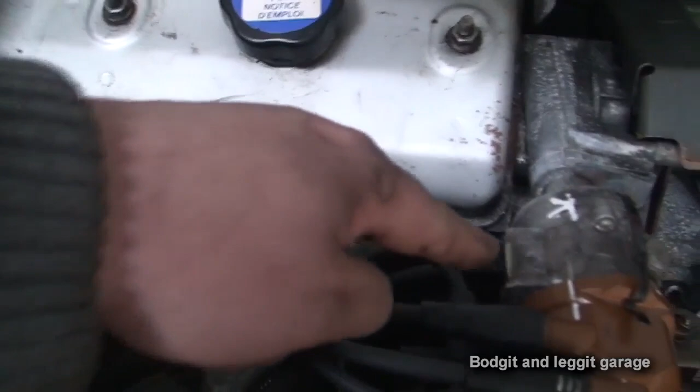Right, as you can see, we've got everything nice and tidy. Hope this is all coming across. I've tidied all the wires, but not only that, hopefully I can show you this - I've put conduit around all the wires, just so you see it coming here, all the way up here and all the way down there. I've left the middle there where it's joined, and then I put conduit all the way in there.

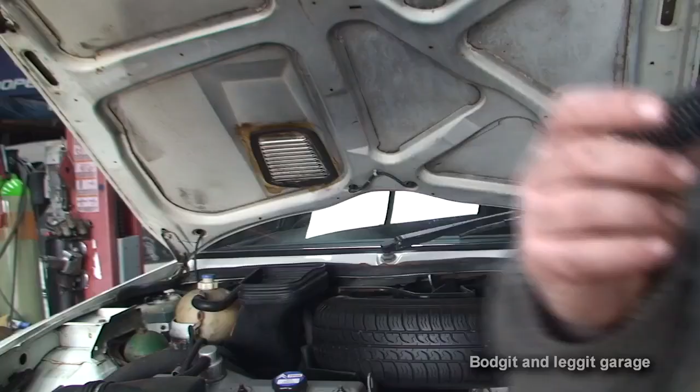So all the wires are covered by conduit. This black conduit is absolutely brilliant. You can get all different colours, but it protects the wires and makes them look neater. When you look down there, you can't really see it, so you're not seeing 3 or 4 different coloured wires - it just looks a million times neater. If you're going to do a job, you might as well do it properly. You get it in all different thicknesses and sizes, and it's split in one end, as you can see, and you just feed your wires through it. It's absolutely brilliant, and it's not really that expensive for what it can do.

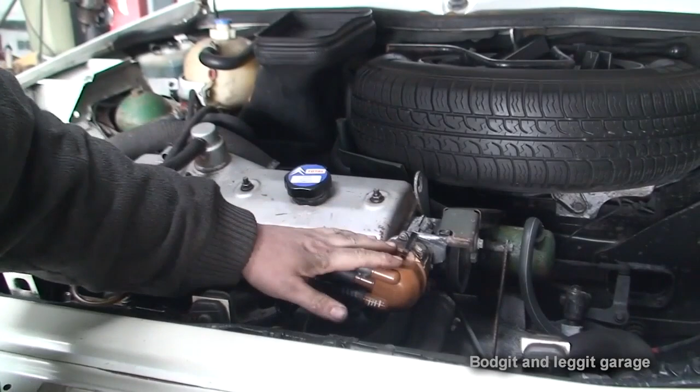The next thing I'm going to do is strip all this again, because I have to glue everything in place and Loctite everything. So once I've got all this stripped off, I will show you what I'm going to do with it.

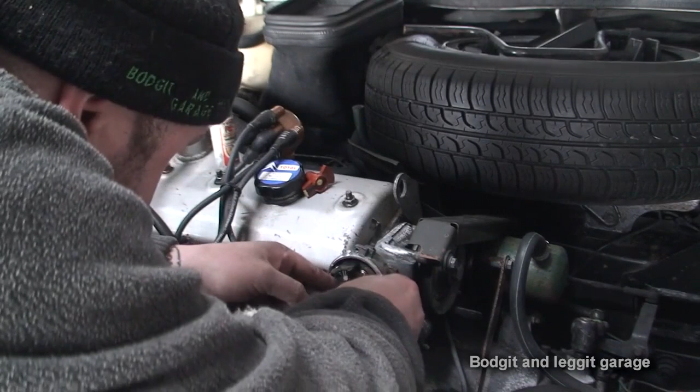Right, as you can see, we're back down into the innards of the distributor. I'm going to take off the little spacer I made - we don't need that anymore. What I'm going to do is mark this rotor again, just with a new mark, so I know exactly where it goes. So now I need to take off this rotor, or the chopper should I say, which luckily enough I can just do. A bit of luck, but again we can do it.

Now what I need to do is undo all these bolts and put Loctite on all of them. So I'll do one and show you, and then there's no point me showing you the rest because it's going to be all the same. So I'm going to take one off at a time.

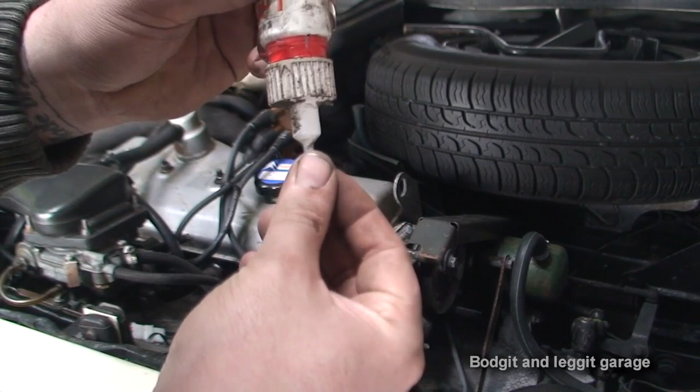So just put Loctite over it, and put quite a lot because I want it to stay there. I'm going to tighten that up, and do the same with all the other 4. Once I've done that, I'll turn the camera back on.

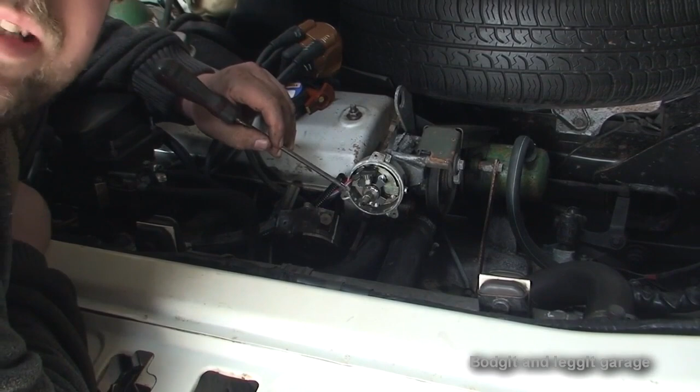Now, I've just noticed the camera wasn't recording, so I don't know how much I've got of this. What I've done is I've mixed some 2-pack epoxy glue and put a bit of sand in it, just to give it a gritty feel, so when it sits in. I don't know how much I've got, but I've mixed the glue, pushed it on, and now I'm gathering the glue from the bottom.

Just keep making sure it's going to go around the whole thing nice and evenly. So yeah, I was talking to myself on the camera, and unfortunately it was a kind of important part that I missed. All I was doing, to be fair, is I put glue inside the chopper and pushed it on, and as the glue was coming out, because I used too much, it came out on this side, and I'm just trying to keep it set so it's all around nice and even, not just glooping to the bottom too much. It's going to take a few minutes messing around with this to keep it as nice and even as I can.

And after a few minutes, hopefully that's set and we're sorted. So I'm going to turn the camera off. Once I've got this set, we'll turn it back on, and hopefully we are more or less done.

Yeah, can't believe I missed all that. Anyway, like I was explaining, it's just 2-pack epoxy glue. I mixed it with sand, put it inside the chopper, pushed the chopper onto the bar and let it set. That's essentially all I did.

Now it's all set. I've got a nice glue all the way around and inside, so hopefully it shouldn't go anywhere. The only other thing I did, I slightly trimmed the chopper blades, just took a few mil off each blade to give me a little more clearance. It's not going to affect anything, but I just did it.

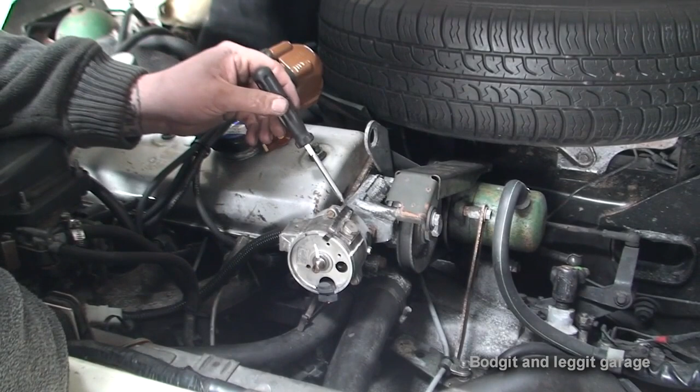I've also cleaned them off here, but what I've done is, the camera might not show up, but I've got a little saw blade and I've just put a cutter mark into this. The reason why I've done that is because if we have a problem with this down the line, if this moves, I'll know it's moved and I know where to set it to. The Tipex marks can look a bit untidy, so that's why I've done that.

Next thing to do is tidy up this and take all the Tipex marks off my cap, because again it can just look untidy. Now, I need to start this again to make sure everything is okay, but before I do that, I'm just going to wipe all these Tipex marks off this.

Right now, we've pretty much done everything, cleaned up all the wires, glued everything in. I've left the glue for about half an hour or so, even though it does dry in about 5-10 minutes, I've left it for half an hour before I start it. I'm going to start it, let's see if it does start. If it doesn't, we're in trouble.

So I'm going to see if it starts, and if it starts, I'm going to take it for a drive over the next couple of days just to make sure everything's working fine. So fingers crossed.

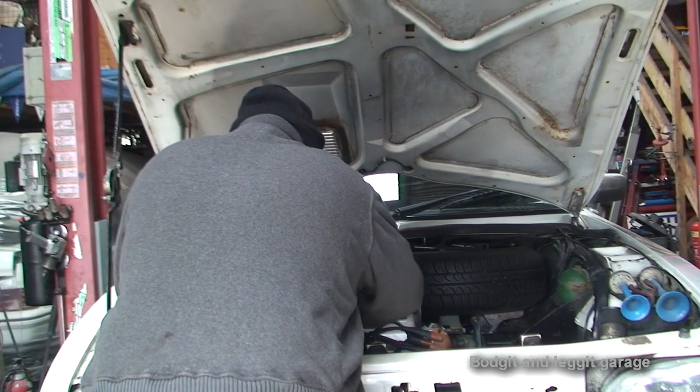The choke is on, but it does start, sounds good, so I'm glad that this video has worked. Take this for a drive over the next few days, and yeah, so look.